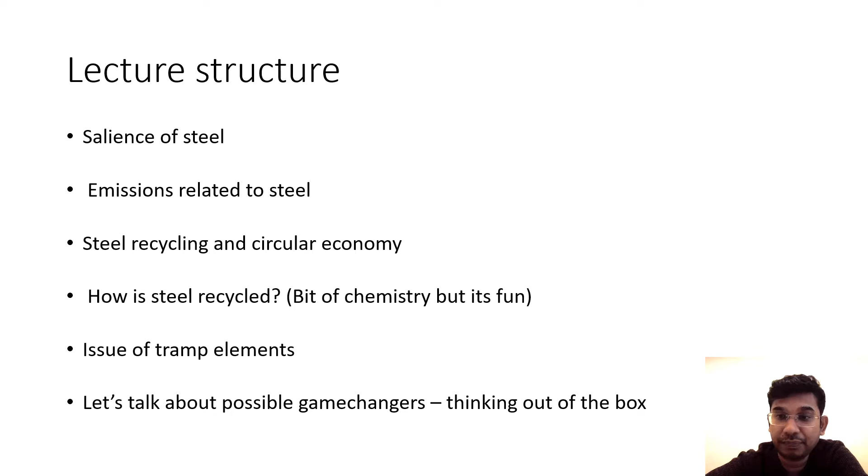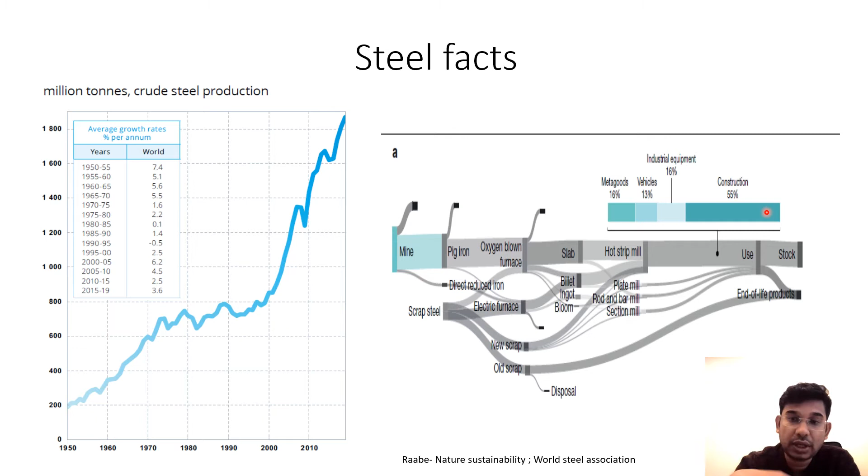And this relates to a lot of topics that we are going to bring back in this lecture—the residency time, how much the steel stays inside these buildings and structures, and how soon or how delayed the release of scrap will be from these buildings, and will it be enough to satisfy a closed-loop circular economy of steel. So we'll come back to all these very interesting questions.

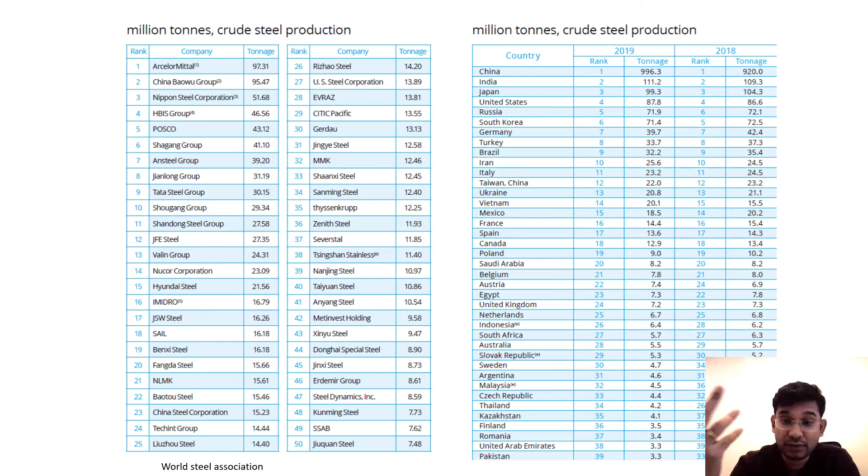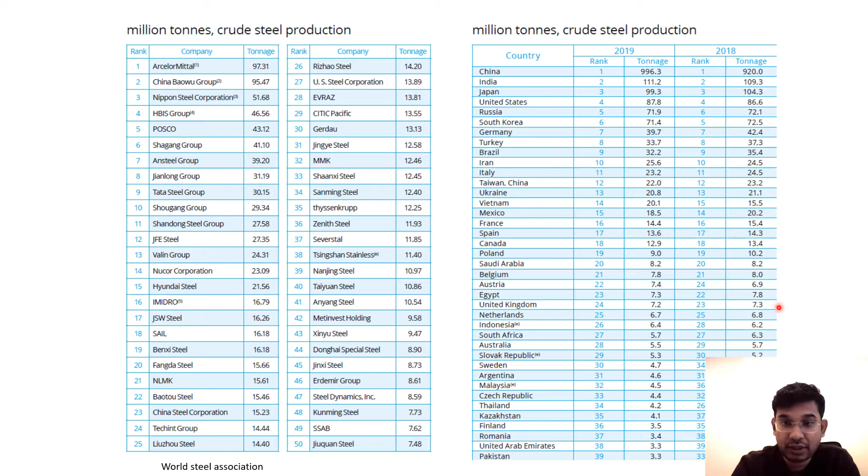Okay, so you see the top producer, produced in billions of tons. The top producer is China, and India also produces a lot of steel, and the top company is ArcelorMittal, followed by so many other companies. But the key news here is the magnitude, the amount of steel that is getting produced every year. It's a lot, and that brings us to the next important topic, the emissions.

So this is really significant. We are talking about 1.85 tons of carbon dioxide per ton of steel, and we are producing billions of tons, and this is translating into 3.7 gigatons of CO2 in a year. We are talking about a really huge magnitude of emissions. Just to put it in perspective, it's on the scale of USA or China's emissions—that's the emission level we are talking about. So it's quite a bit of emissions in terms of the numbers.

So 7 to 9% of direct emissions from the use of fossil fuels is from the production of steel alone. And a very important number here is that if we are going to go towards 1.5 degrees Celsius global mean surface temperatures, the emissions from this production should be cut down by 80% of the level it is now. That is asking for a lot.

It's not just a snap of a finger where you say, oh, we just recycle steel and solve this puzzle. It's not easily solvable. Recycling offers real benefits in terms of saving energy as well as reducing emissions, but that is simply not going to be enough if we are going to stick to 1.5 degrees Celsius GMST.

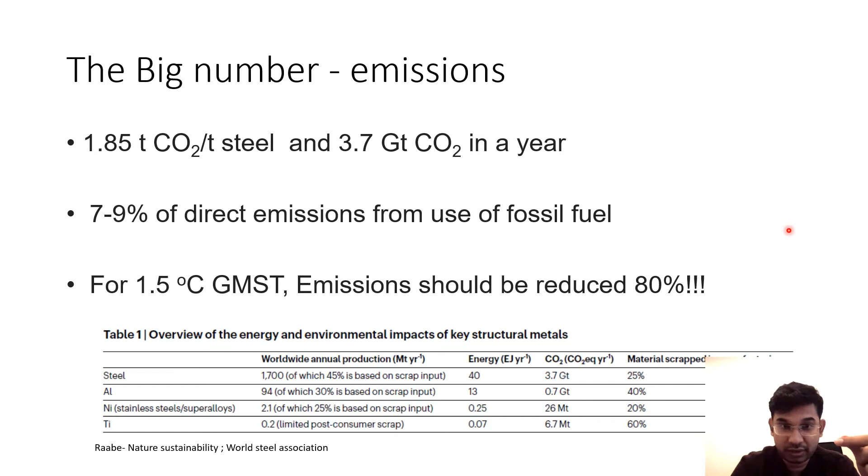Okay, it's an important slide, please pay attention. So the first thing is that steel industrial recycling is a very well established process. We have an enormous percentage of recycling of steel, we're talking about 85-90% from some sectors, and the target rates of recycling are much higher in the forthcoming years. In Western Europe already 55% of production of steel is from scrap.

And pay attention here. So we have the primary production of steel process, which is called the BF/BOF route, the blast furnace basic oxygen furnace process. And then we have the secondary production, that is the recycling process, which is done in the electric arc furnace. But scrap is used in both these processes.

In EAF, it can be exclusively scrap. So EAF is a traditional secondary recycling process, but the scrap is also used in the primary process as a coolant. This is an important complexity that you should understand. And in EAF, sometimes you also have usage of DRI, direct reduced iron, from which steel is made.

For the traditional BOF route, you have 1,770 kg of carbon dioxide per ton of liquid steel, whereas for the electric arc furnace route, the secondary production, you have substantially less CO2 emitted per ton of liquid steel. Same for the BOF in terms of energy consumption: it's 4,900 kilowatt-hours per ton, whereas for EAF it's quite less, just 1,100 kilowatt-hours per ton. So you have a very well-established recycling process with well-defined savings in energy as well as emissions.

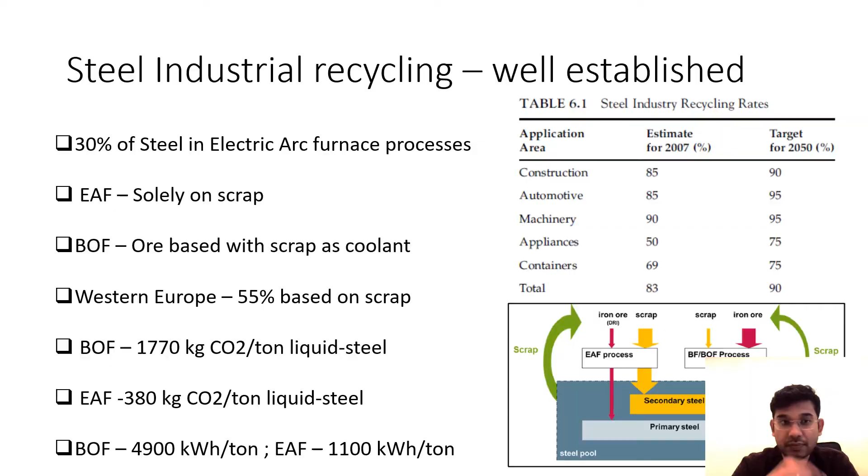Here's something I wanted to talk to you about. It's from an article in which they wanted to calculate how much kilograms of CO2 in terms of emissions they are saving because of the usage of scrap and because of recycling. And they encountered one complexity and tried to solve it. For instance, for the BOF route, the basic oxygen furnace route, the LCI, the life cycle inventory for steel production, also includes scrap.

So what they wanted to simply know was, imagine that if you didn't use any scrap, imagine if it is 100% based on primary metal production with zero scrap input, what would actually be the emissions from that per kilogram of steel? That's the only question they have.

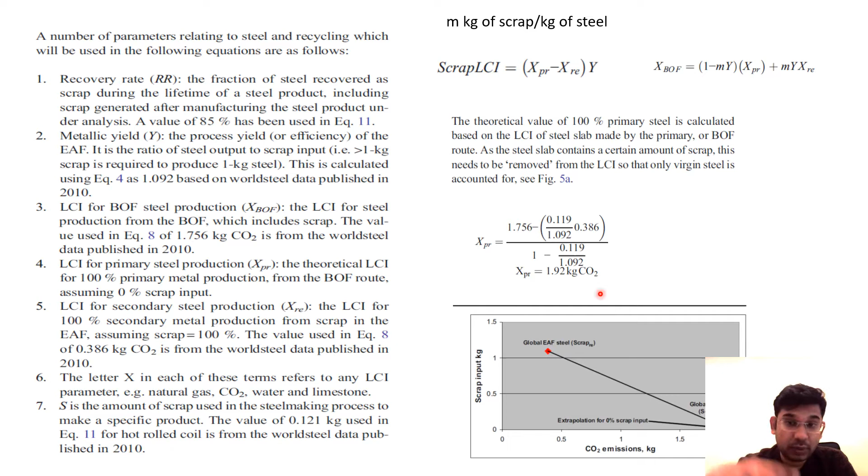So they tried to solve it with multiple different equations, and they tried to come up with the scrap life cycle inventory, and all these terms you could read through - this is something you already know. So they found that for the primary production, with zero scrap input, you emit 1.92 kilograms of carbon dioxide per kilogram of steel.

And then they finally found out that you save 1.5 kilograms of CO2 emissions, because the other thing is already measured, with 13.4 megajoules of primary energy that you save, which translates into 73, 64, and 90% savings in emissions, energy, as well as reduction of ore use when you compare it with 100% primary production.

I already told you this two slides before - why did I bring it up? Because just read through these two slides, it's about thinking about a methodology.

So they had a problem in hand. They thought, okay, we can have the BOF route and we should be able to calculate how much we save, but how can we know the numbers when the real production doesn't happen with 100% primary input, but they also use scrap. So they had to go from scrap-based input to simulating an input where they don't use scrap, and then subtract it to find out how much we have in savings. That's how you think about a methodology in terms of using the life cycle inventory to calculate savings in emissions - just to introduce you to a methodology, nothing more.

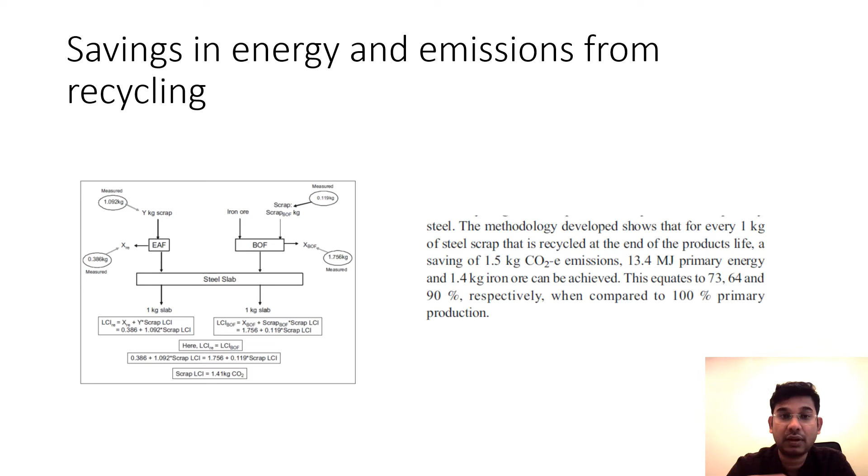Here we are going to talk about a study focused on steel stocks in the entire Chinese steel cycle. It talks about the relationship between the role of stocks and the conception of steel circular economy within China and the circular economy package of China. It's very important because China is at the forefront of steel production, and they have done material flow analysis, which gives us scenario-based projections until the end of the century. So it's quite an important thing to look at.

So what do we see here? When they tried to do the prediction in flows in tons per year, you could see that it has a sort of peak after which it normalizes. So what they are predicting is that there will be a consumption peak right around 2025 to 2035, after which you will have a drop down, and at the end of the century we will be somewhere at 60% of the peak value in terms of consumption. That's a really important fact.

The second thing is they predict there will be a continuous drop in domestic demand. There are many reasons for this. One is that there will be a decline in population, combined with the fact that there could be advanced developments in infrastructure—notice again, steel is primarily used in the construction sector. So this will lead to a drop in domestic demand.

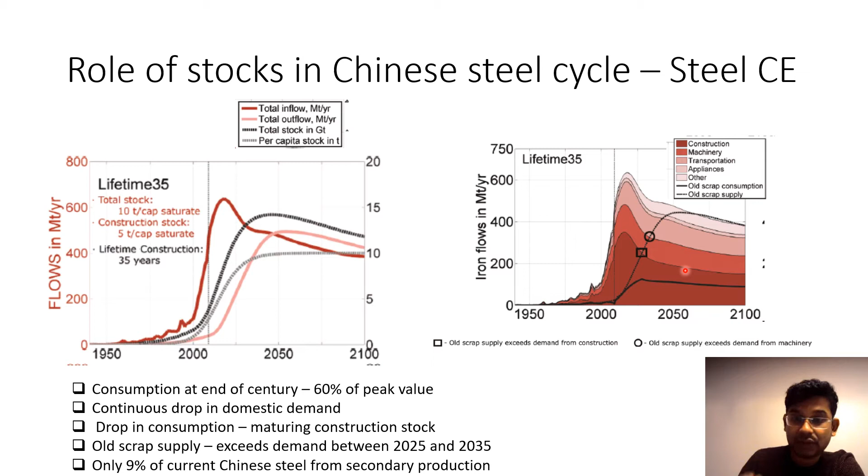Here they postulate three important challenges that are going to come forward, and we will see all three. The first challenge is quite interesting to think about, because these challenges are very particular to steel, and as I've already explained, steel is going to play a really important role. So the first challenge is that they are going to face a consumption peak. The in-use stock is growing at a really enormous rate, combined with the fact that domestic demand is going to decrease.

And how do you solve these things? Either you can curb the production capacity extension. Because already there is a reasonable expansion of primary production happening now in China, you have to curb that somehow, because if you encourage more primary production, once the consumption peak happens, there's going to be a trough. The consumption is going to drop down. If you have enormous production capacities that depend on continuous production, it's going to oversaturate the market. The steel has to go somewhere, and that's going to be a problem for sustained production. So one way to address this is to curb primary production. The other way is to think about sustained growth of the construction sector.

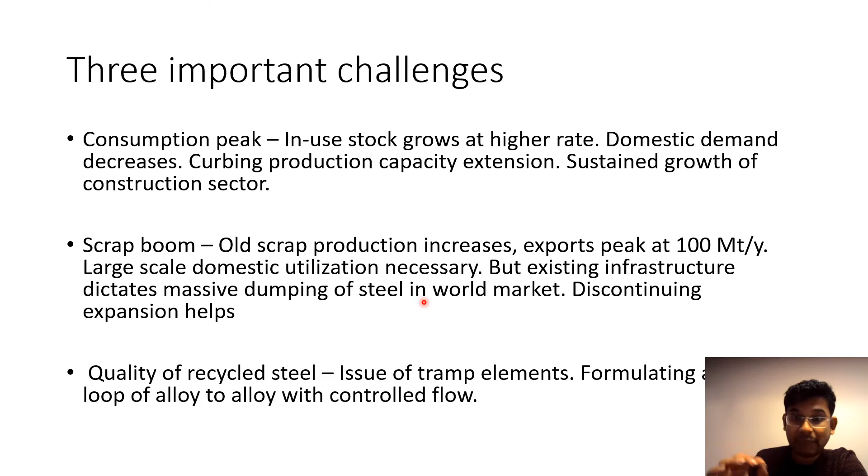So that's the definition of downcycling. So you also have the issue of tramp elements as well. Keep in mind these three important challenges.

From here on, we are going to talk a little bit about how steel is recycled. There won't be a lot of exam questions from this, but it's for your own curiosity to understand how it actually happens.

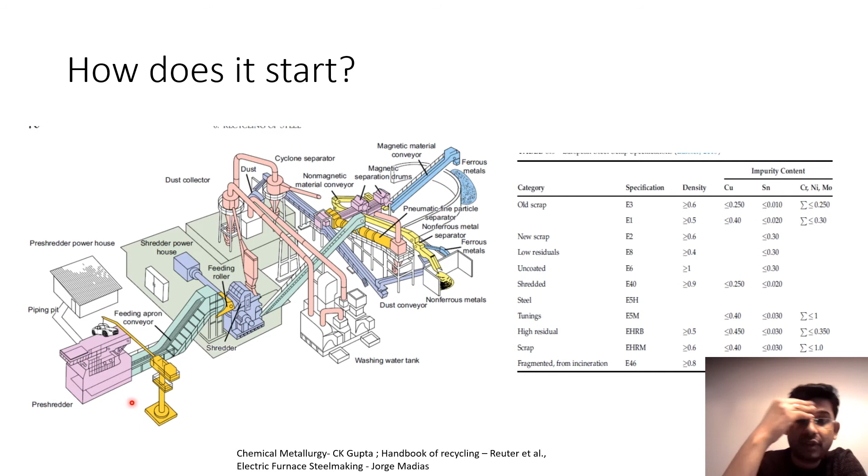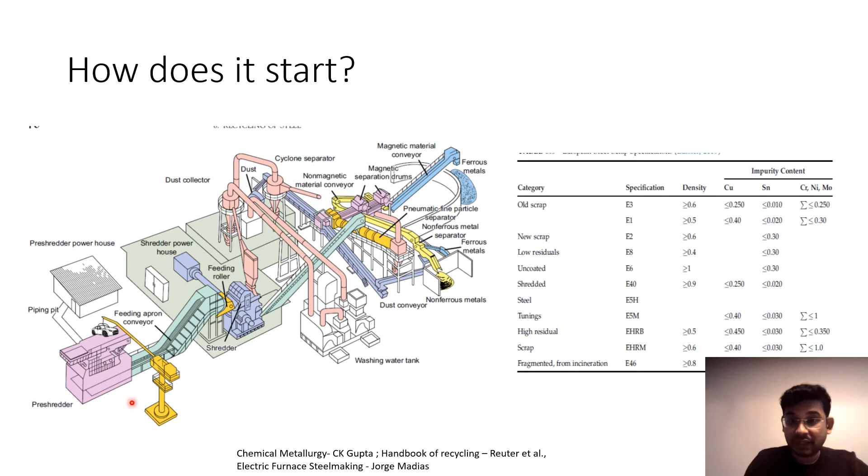You already know there are many different types of scraps, and all these scraps have different impurity contents and are classified as such. Usually when you have a lot of waste with steel in it, you use a shredder, where you shred these multiple different products into really small particle sizes, and collect the dust using a dust collector. Then you typically have a magnetic separator, which gives you a ferrous fraction that is more magnetic, and a non-ferrous fraction.

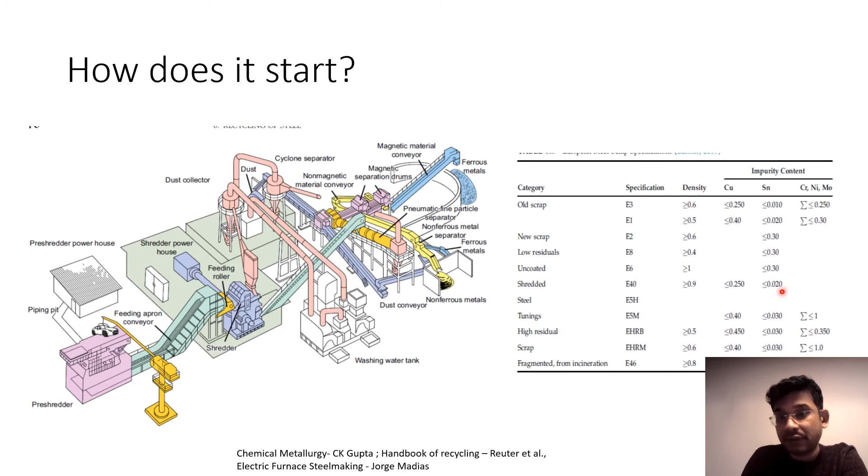This is a crude way of seeing it. There are so many different separation processes applied to each product in different manners. Firstly, there's sorting and preparation for physical separation, separating metallic products from non-metallics, done using multiple different techniques, sometimes hand sorted. Then there's size reduction, sometimes using a press, and shredding and fragmentation.

Usually this is done on an enormous scale, using magnetic separation and eddy current separation. I'll give you a little taste of how eddy current separation works, because I saw it in a plant and it's quite interesting. There's also heavy media separation, usually flotation, where depending on density you separate non-ferrous metals from the shredder residue, and so many other techniques as well.

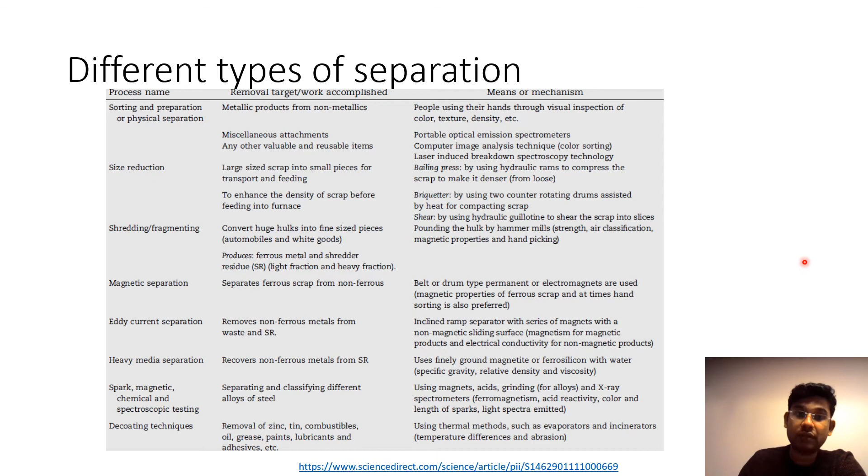Sometimes steel is coated with zinc, so you have a step of de-zincification where the coating is removed so that you could process the steel easily. So many different steps - this is just a small visualization for you.

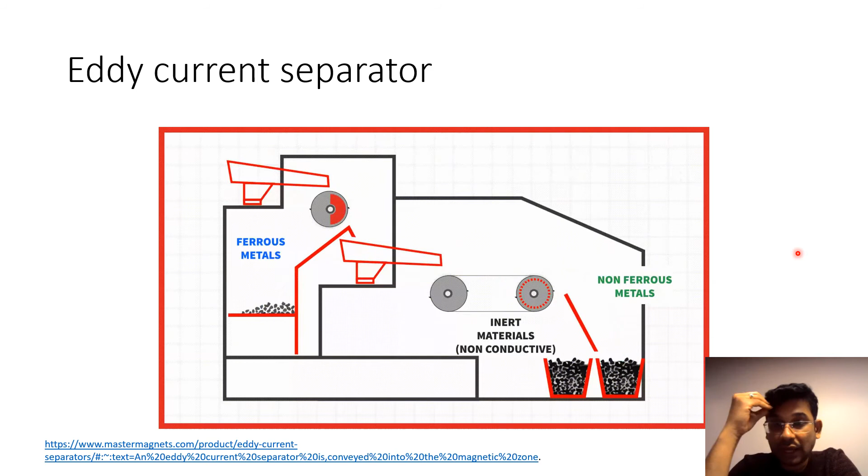Eddy current separation usually works based on Lenz's law. A conducting material which goes through a magnetic field develops a current, which then generates a magnetic field in the opposite direction to the one originally applied. I've seen it live, so it's very interesting to see this.

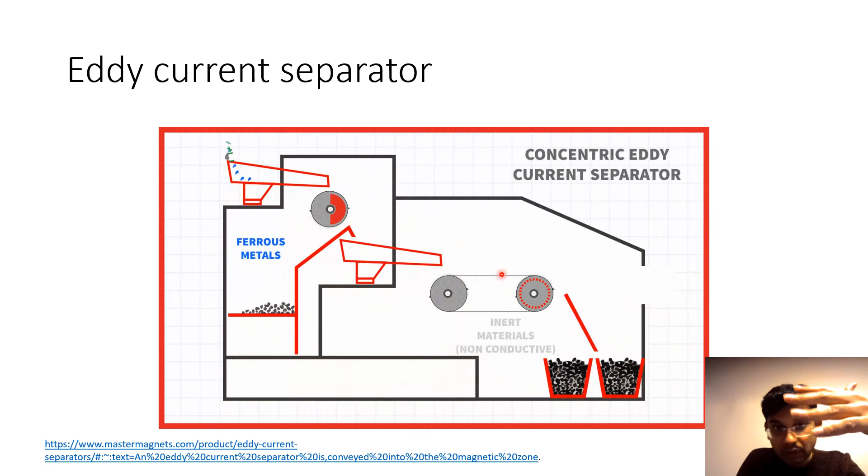They first have a magnetic separation in which the ferrous metals are taken away. So you have the non-ferrous metal as well as the inert non-conductive plastics and other components. You pass it through the eddy current separator, which works based on the law I just explained. So you get a repulsive force for these non-ferrous metals.

So you can YouTube it from here, I don't know if I gave you the link. Basically, the aluminum and other stuff flies away - you can see it fly away in this animation and get gathered in this box. Then the plastics and other stuff gather in this other box. It's quite a fascinating thing to look at.

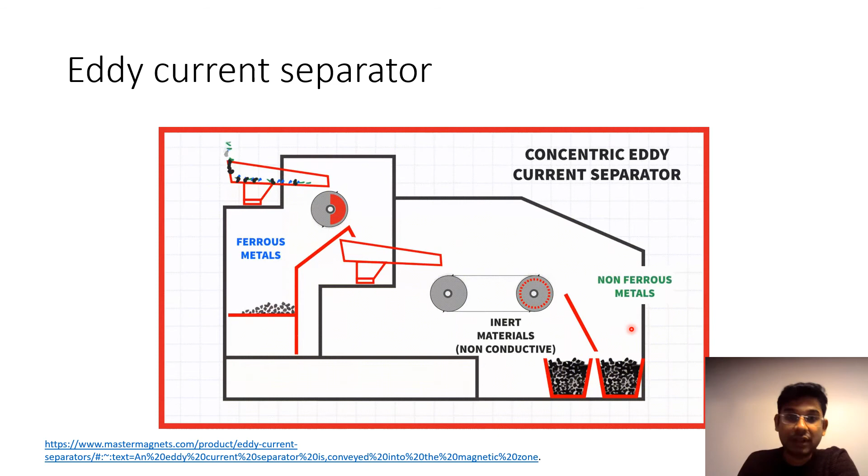Steel recycling is done in an electric arc furnace. It's basically a smelting/melting reaction. You have three different electrodes, you charge a lot of scrap, lower the electrodes, and pass current to melt your waste. It's usually a really exothermic reaction, meaning there's production of energy from this reaction, making it spontaneous.

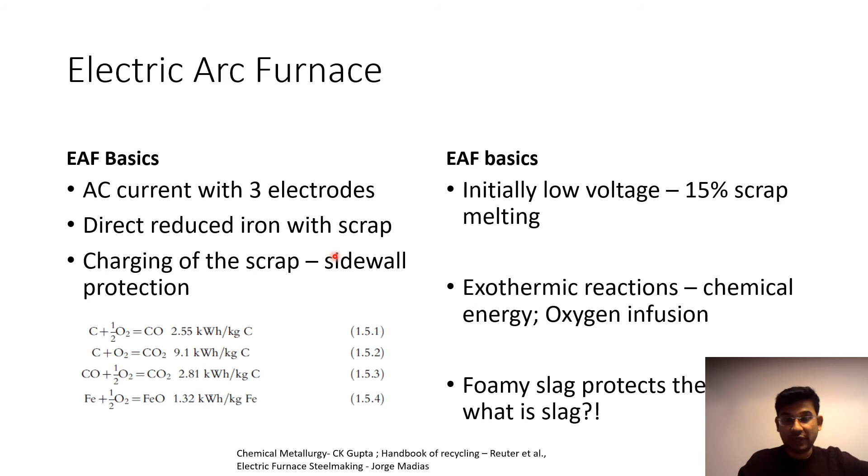What happens is you have formation of a slag during this reaction, which protects the sides of the furnace. So what is a slag? I'll give you an example. We are going to see a little bit more into detail about how things work in terms of chemistry. It could be interesting to you, it may not be, but just listen it out.

Smelting is a melting operation with phase separation. You have production of your metal, or in this case an alloy - production of steel - and then a component called slag. Based on density, the metal stays down and the slag stays up. But what actually goes inside the slag, and when you melt a waste, how do you make sure something becomes a metal and something becomes a slag?

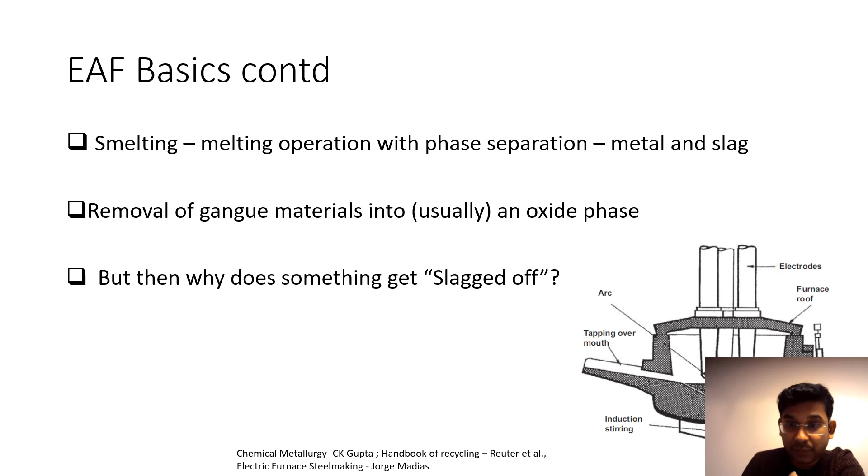That's an interesting question. What you want to do is remove the impurities, called the gangue, into an oxide phase, which is the slag. But what is the chemical principle behind slagging something off?

It's in the Ellingham diagram. I know it could be a little bit too much chemistry for some of you, but it's easy, just listen me out. In a lot of metallurgical processes, they do what's called carbothermic reduction or metallothermic reduction. They use carbon as a reducing agent.

So you have ores, let's say oxide ores or even sulfide ores, or sometimes wastes present in oxide form or some other form. Typically what you want to do is reduce them, remove the oxygen so that you could produce the metal. Ellingham is a scientist who came up with this diagram which plots the free energy versus the temperature, the Gibbs free energy versus temperature.

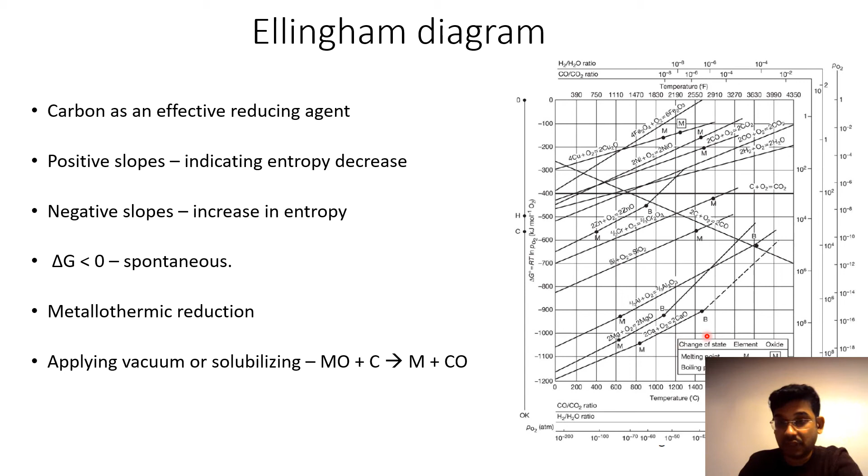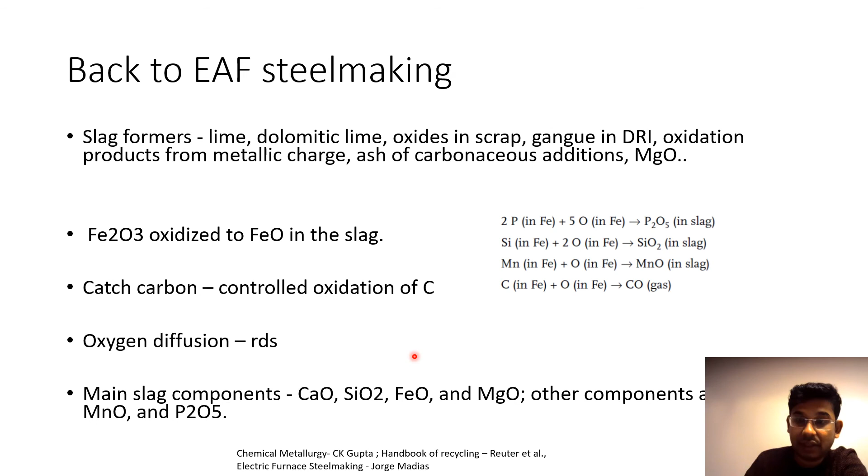I'm not going to go a lot into the chemical details. It's suffice to say that you have phosphorus, silicon, manganese, and all these things going into the slag phase by reaction with the oxygen. The oxygen diffusion is really the rate determining step, and to encourage this slagging, because it's sort of this kinetic enhancing step, they use slag inducers or slag formers so that you can have the removal of the gangue material and the enhancing kinetics of this reaction.

So let's get into the issue of tramp elements. I hope you understood how the EAF works, the electric arc furnace works.

Basically, it's a smelting reaction in which the scrap is melted to form iron, but you want to remove the impurities so that you slag them off to an oxide phase. What forms and what goes into the oxide phase is dictated by chemistry, and that is shown in the Ellingham diagram. So this is, in a very simplified manner, an important slide.

This is something very relevant to circular economy, to steel making, and to recycling: the issue of tramp elements. Because we use so many alloying elements—vanadium, chromium, aluminum, silicon, and tungsten—all alloyed with steel for specific purposes, which you could easily Google.

The issue is you are going to have the collection of steel from so many different places, and you are not going to have a great level of sorting already because the steel is collected as products from so many different places. How are we going to deal with this issue of tramp elements? Because we are not going to produce one alloy of steel with so many different inputs.

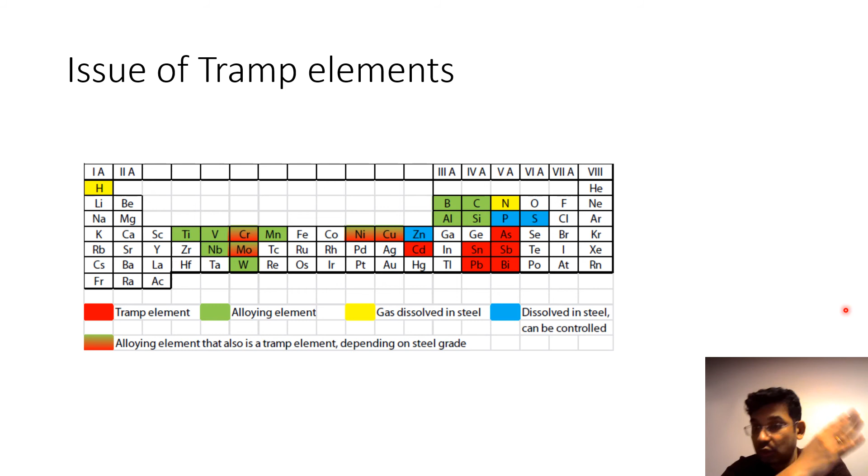You can have an automated or robotic sorting based on infrared or other techniques, where it detects that an alloying element is present, so you take it down to this side and pass the other steel forward. That's a possible way, but it's a complex issue to solve. When you want successful recycling of steel, you have to have a strategy to deal with the tramp elements.

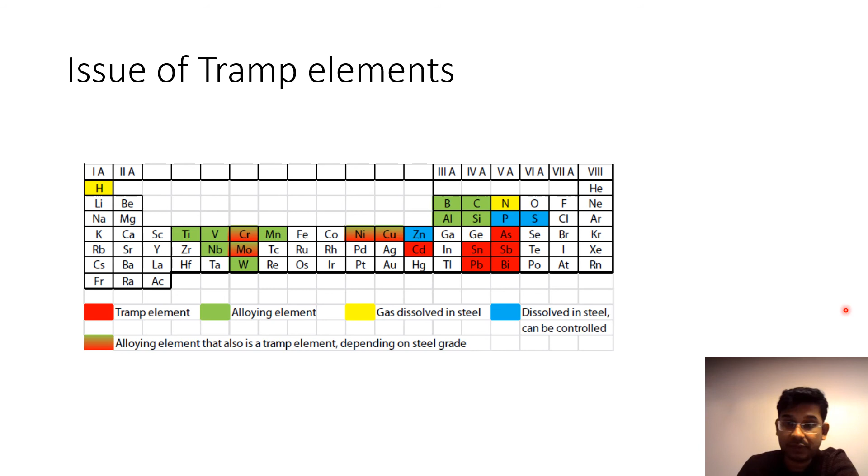So how do we do it? Not so carefully, not so easy—you have multiple ways to deal with it. You can have, as I told you, a dezincification process to remove zinc.

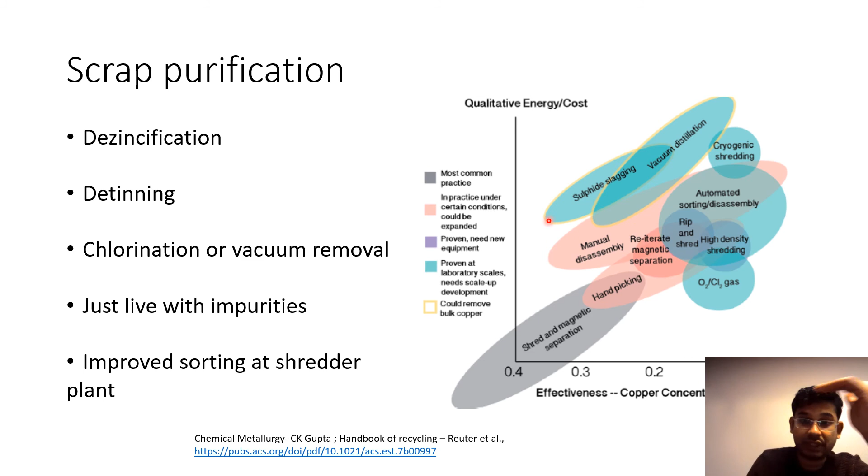So until now, I presented various aspects of steel, and the next couple of slides are a little bit out there—really out of the focus of even what I'm dealing with in regards to recycling or circular economy. So if you want to switch off here and end the presentation, feel free to, because it's never going to be asked in exams.

But if you're curious about what could be the alternatives to steel recycling, because even with recycling we are going to struggle in meeting the climate targets, continue on. There are two different strategies that are proposed.

One is ULCOS. ULCOS is a project commissioned in 2007, or the results came out in 2007, from the European Union. The EU found about the problem of CO2 emissions from steel long back. Everybody knew it, so they had various different strategies to address it. They had creation of what's called HIsarna, an alternative to the BF-BOF route.

But one of the important strategies, and what they call a really radical solution, is that you could do the production of iron, the metal that's produced at really high temperature in a blast furnace with so much emissions, without any emissions at room temperature using electrolysis. Okay, so that's one solution they came up with.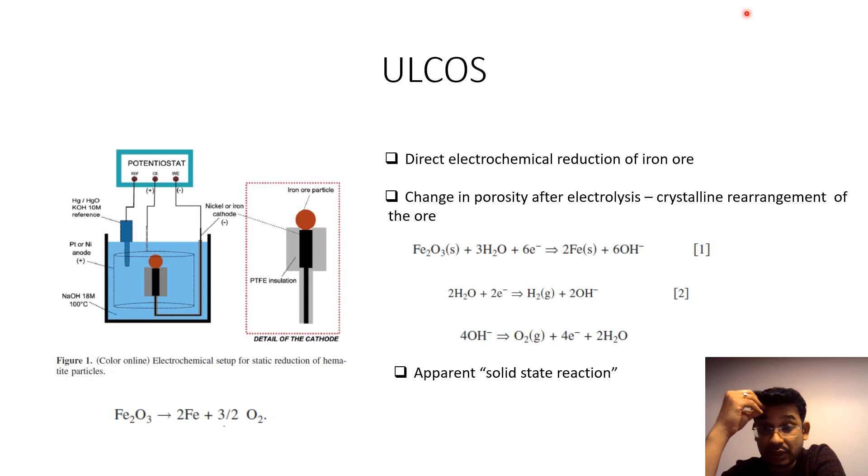Much more important, and something that is already being commercialized as we speak - I think they have $50 million investment - is the molten oxide electrolysis route by Professor Donald Sadoway from MIT. It's very interesting. This paper got published in Nature, and usually many different articles do get published in Nature. It's a highly ranked journal, but not from the extractive metallurgy field - not often, maybe once in a decade. So it's sort of a once-in-a-decade kind of invention.

What did they find? They found that you can take these molten oxides - the ores from nature - and just form the metal by passing current at really high temperatures without any CO2 emissions. And that's a really tricky point, because thus far they have used carbon as an electrode and you get CO2 emissions. So how do you use an electrode that is inert, without CO2 emissions, was the challenge they had.